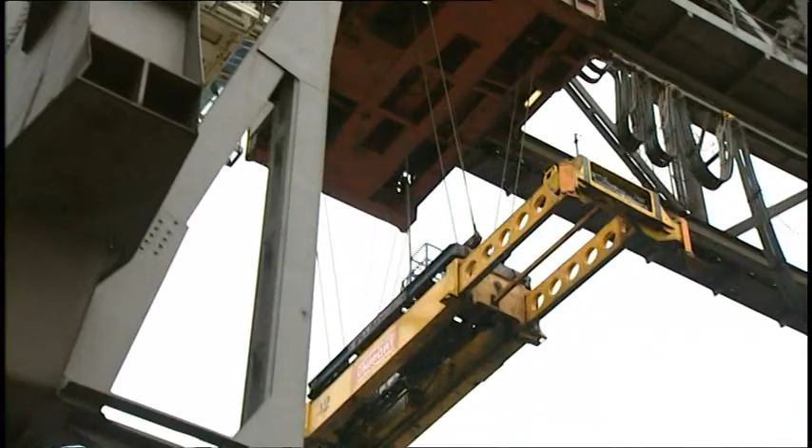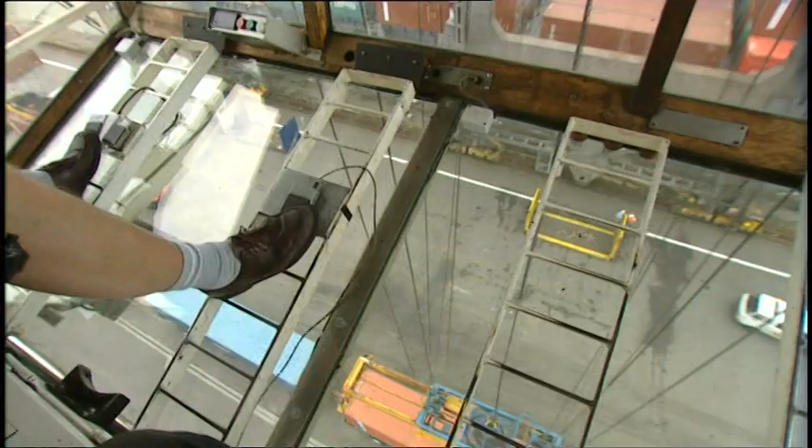Split or torn containers, fewer cargoes would end up like this. Look out for holes near the roof corners. This is what causes them. A moment's lack of attention up here, and a crane spreader turns into a 10-ton hole punch. Okay.

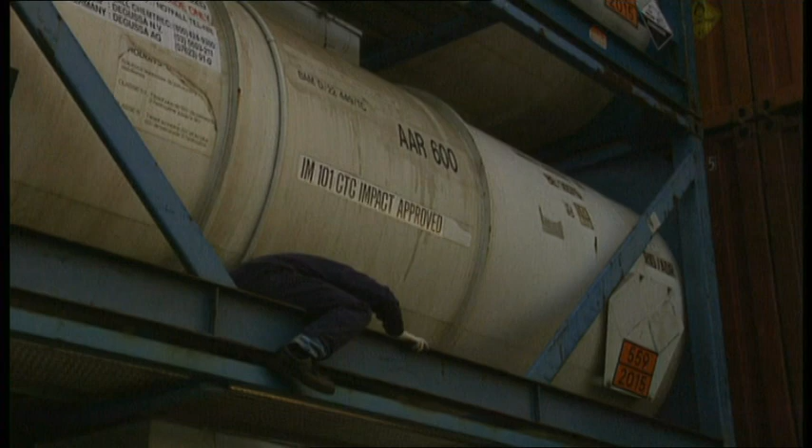Many sleepless nights have been caused by leaking tank containers, particularly if what they're leaking is dangerous goods. Why not save yourself a nightmare? Check them as soon as they're loaded.

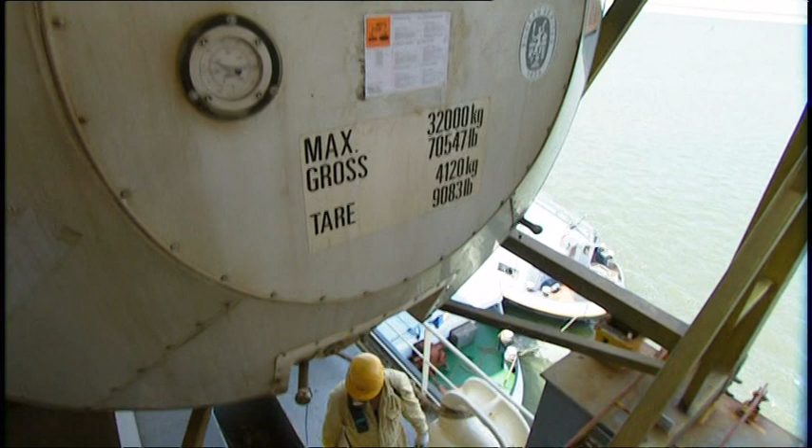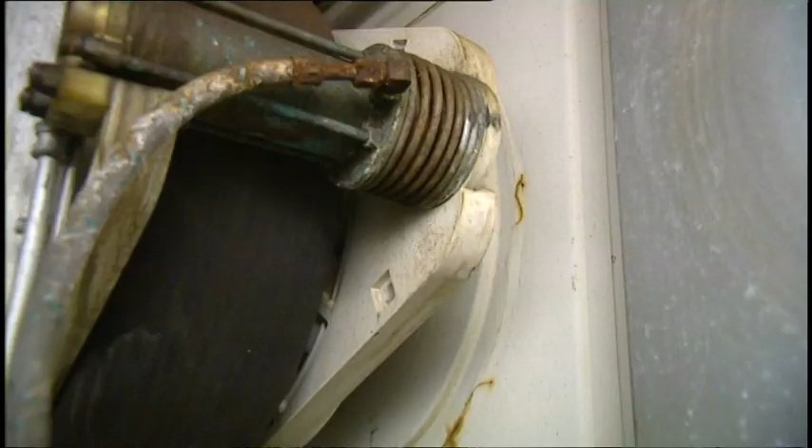Porthole reefers look straightforward enough. Yet it's often discovered too late that one has been stowed where the cold air supply is the wrong temperature for its cargo. Or its portholes haven't been opened and there isn't room to reach them. Sometimes they can't be connected because they're stowed in a slot of the wrong height, or even the wrong way round.

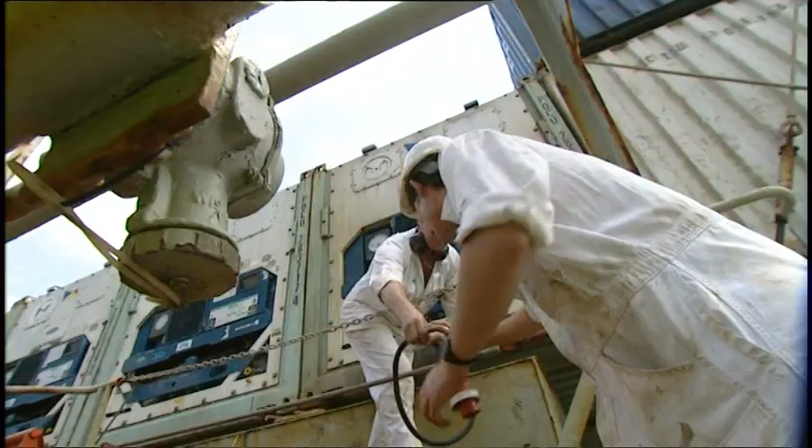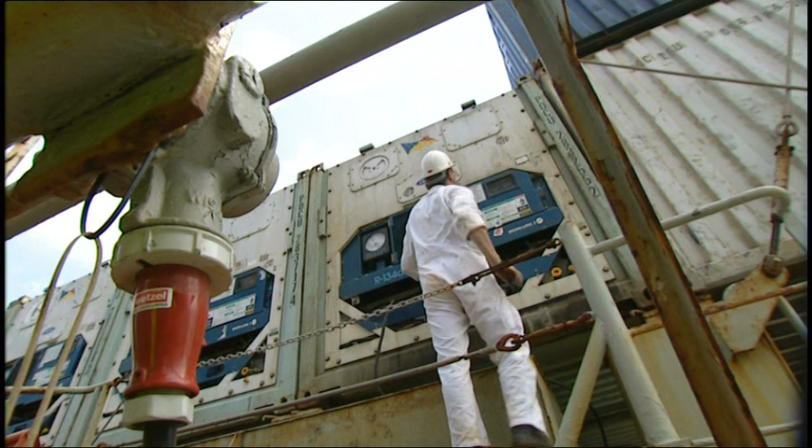Integral reefers need special attention. If the equipment is dual voltage, as it is in many American containers, check the transformer setting before connecting up. Then switch on. It may seem obvious, but simply failing to switch on causes many claims. Now switch on the container's equipment and take a moment to make sure it's running.

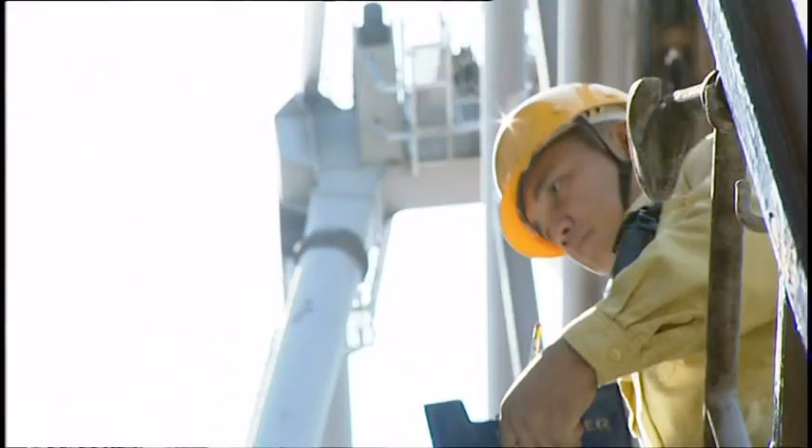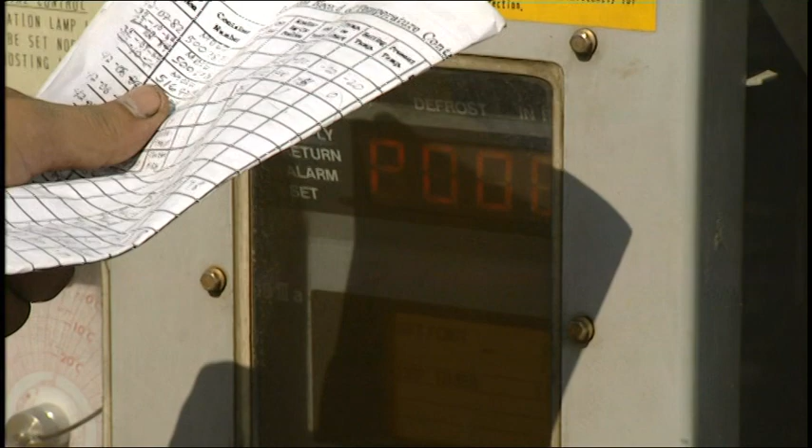It is, of course, vital to check that the equipment is set at the temperature the shipper has specified, as set out in the reefer cargo list. Even this may not be as simple as it sounds. Displays aren't always easy to reach or to read. This one actually says 5 degrees, and it's permanently set to centigrade. Some can be switched to read Fahrenheit instead, and it's easy to mix them up under pressure.

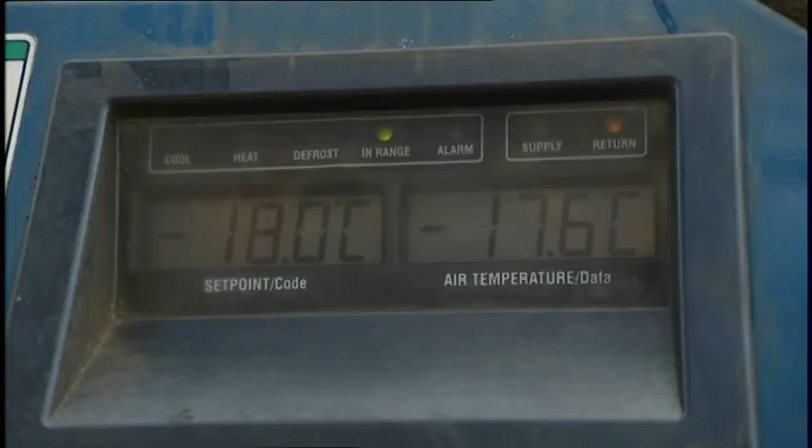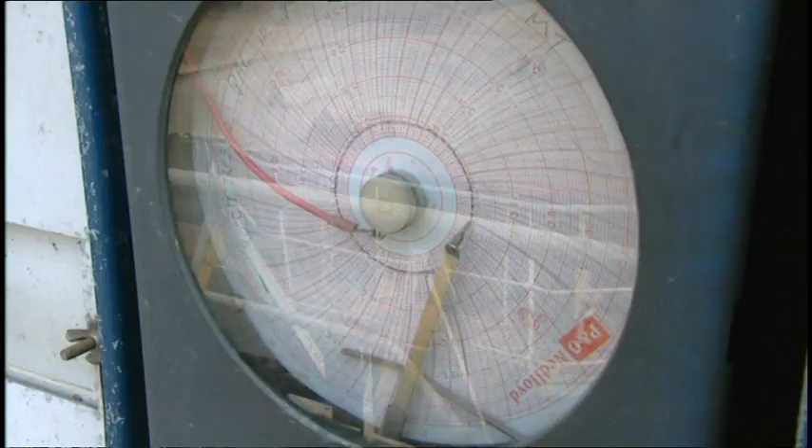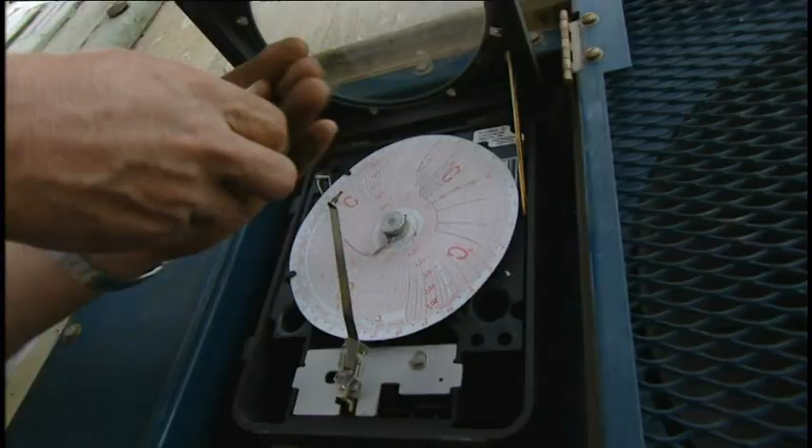To make sure that the set temperature is actually being maintained, it's necessary to check the control temperature as well. Any variation which exceeds the norms for the type of container and cargo carried must be investigated. If a Partlow recorder is fitted, make sure a chart is in place and that it shows the correct temperature has been maintained before loading. If it's clockwork, wind it up.

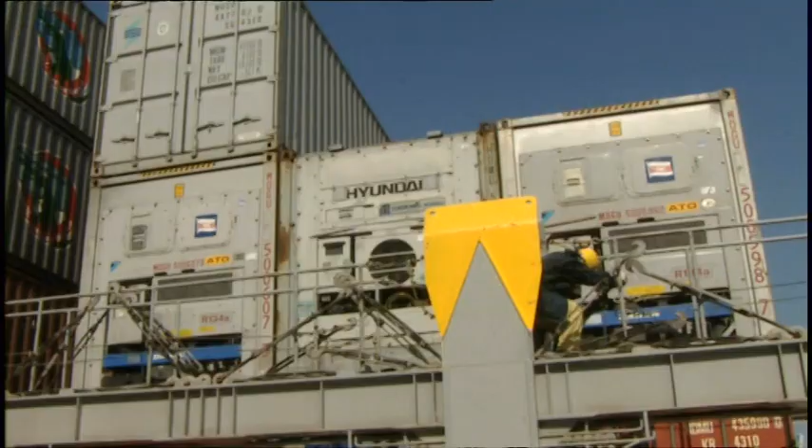The more sophisticated integral reefers become, the more important it is to make sure spares and manuals have been supplied for each type on board. Any irregularities should be referred to the terminal without delay. But unless you've been authorized to do so, never alter a set temperature. In chilled cargoes, getting it wrong by even 1 degree generally spells disaster.

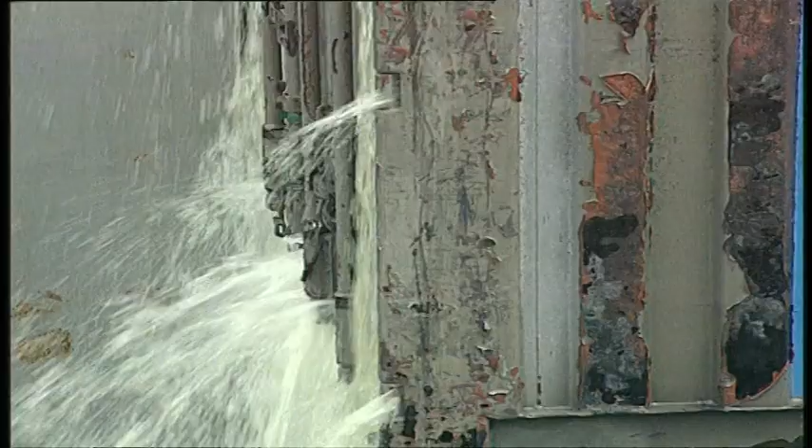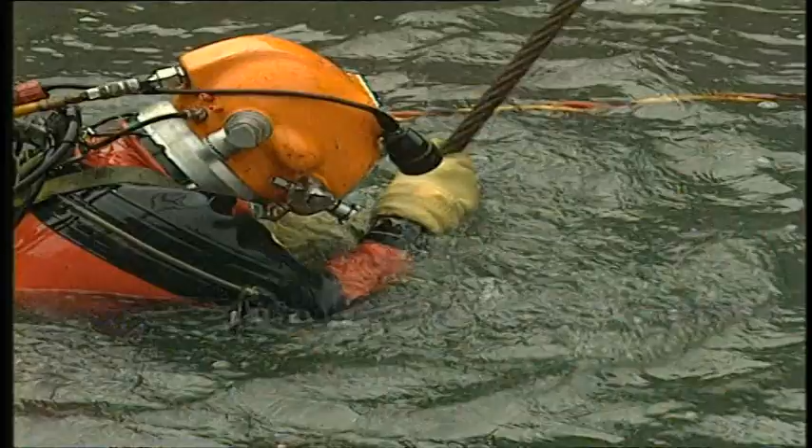Containers overboard add up to 15% of cargo losses. They also endanger other seafarers and the environment. If they cause pollution or obstruction, the ship owner is obliged to recover them regardless of expense.

I couldn't believe what I saw. I've never seen anything like that, never. That's what people around the Sound today were saying about this ship. It's an American...

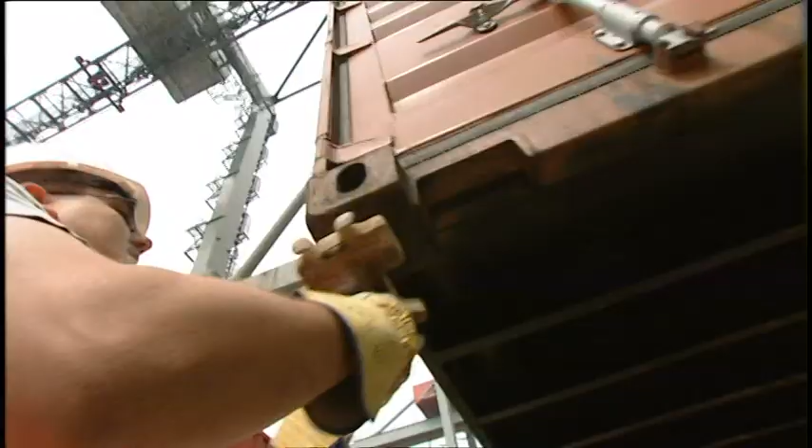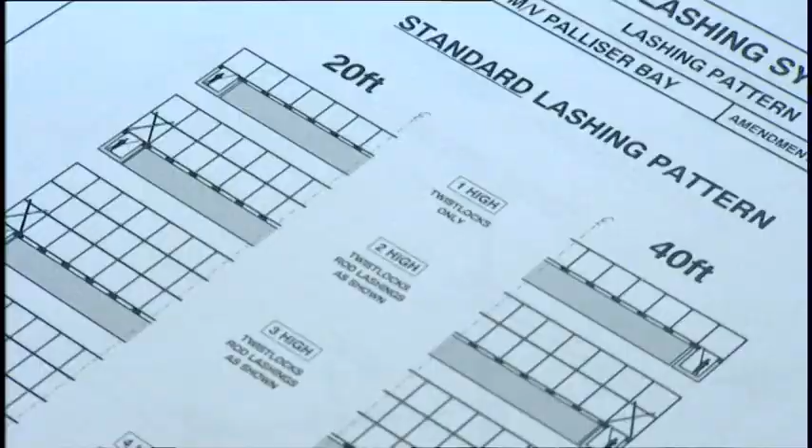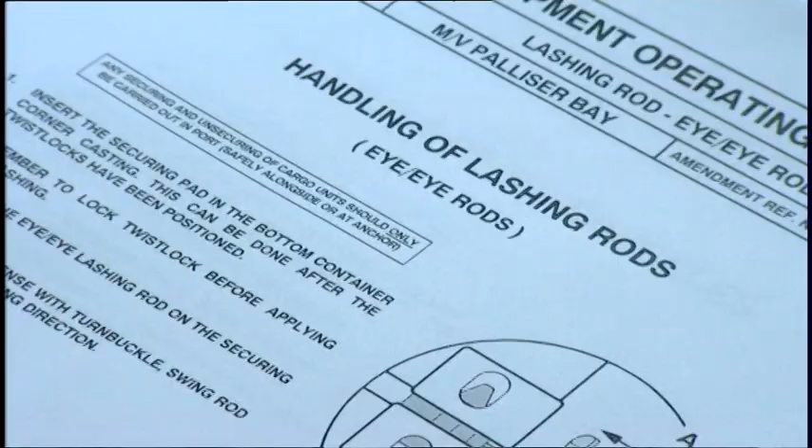Big ships, small crews and fast loading have made it customary in many ports for stevedores and riggers to work unsupervised. But the law still holds ship staff responsible for securing and lashing. Even though you haven't time to direct operations, don't let anyone forget that the securing system is a system. Keep an eye open for fittings used incorrectly or missed out altogether.

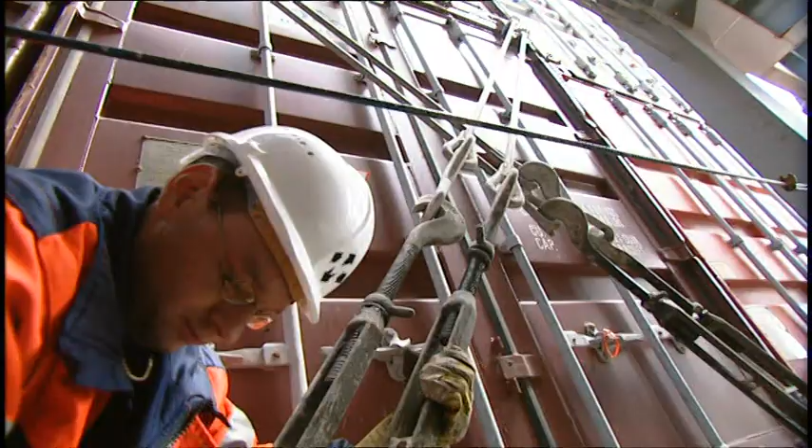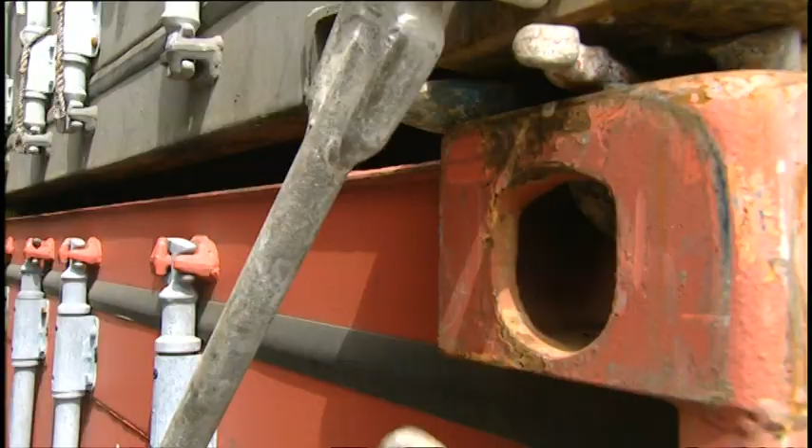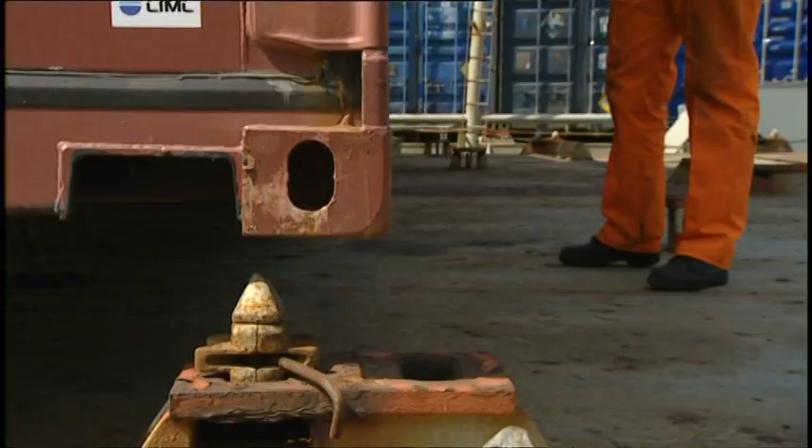Make sure lashings aren't over-tightened. More than hand-tight overstresses fittings and containers. And beware of lashing rods fixed over open twist locks, so they can't be locked. Twist locks must always be the right way up. Using them upside down is dangerous because they look as if they're locked when they aren't. Never allow this. Cracked fittings are the first to fail when the going gets tough. And here's a shortcut that's often cut short lives.

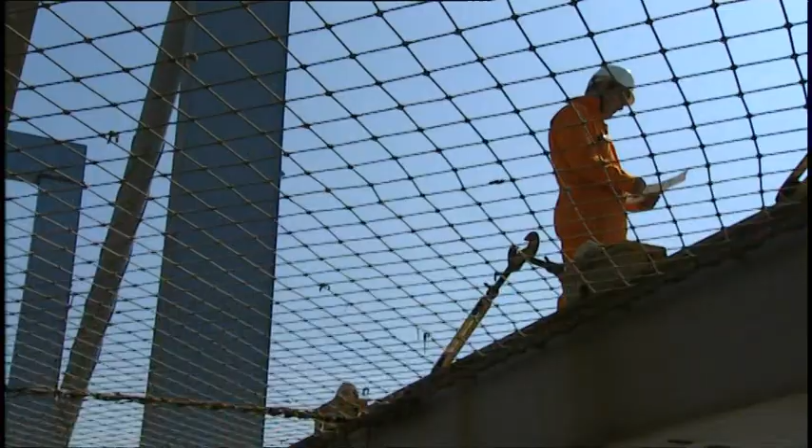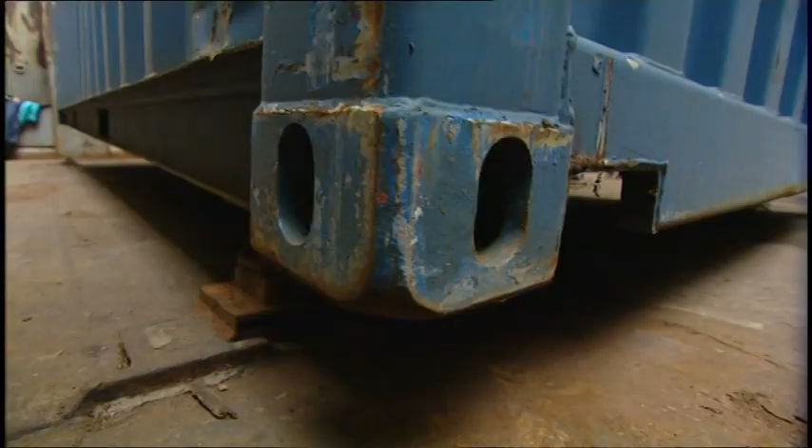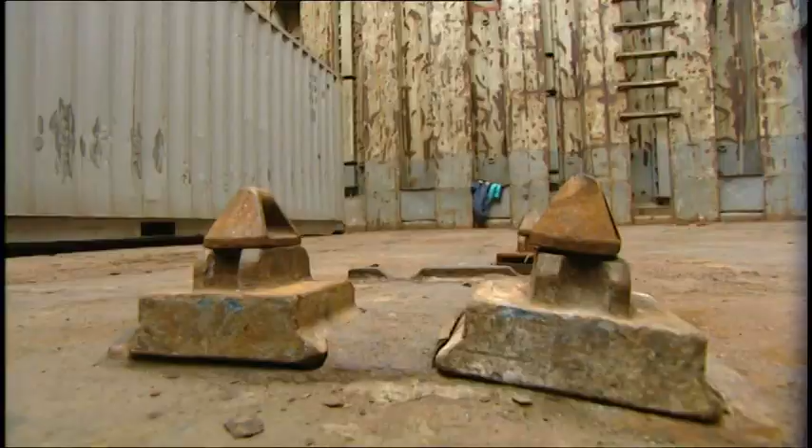Extra care may be needed on ships not designed exclusively to carry containers. The 4 lower corner castings support all the weight. Are they bearing on strengthened areas? Dented tank tops can cause gaps between upper tiers. This may discourage the use of the correct fittings, as well as putting extra stress on them.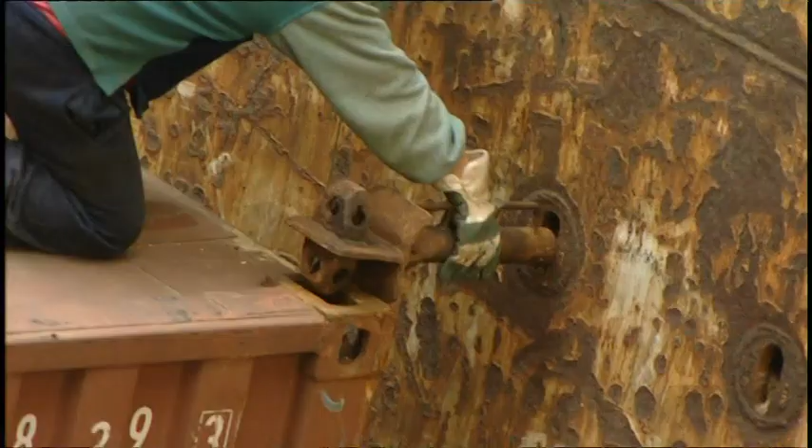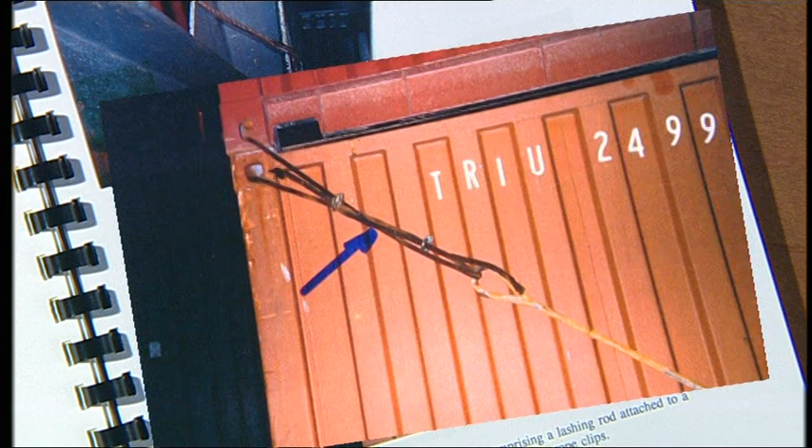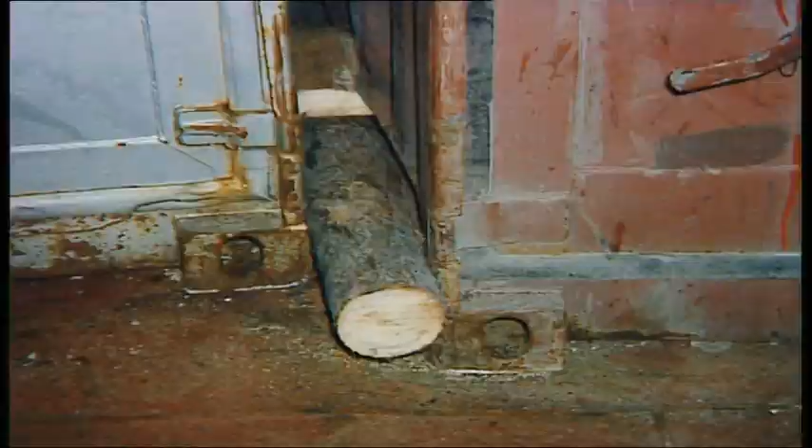Not all holds are as regularly shaped as this one, and securing points may not be where they're needed. But don't allow containers to be secured except by the corner castings. This surveyor's report is a catalogue of bad lashing techniques discovered on one ship. Well-meaning improvisation all too often ends like this.

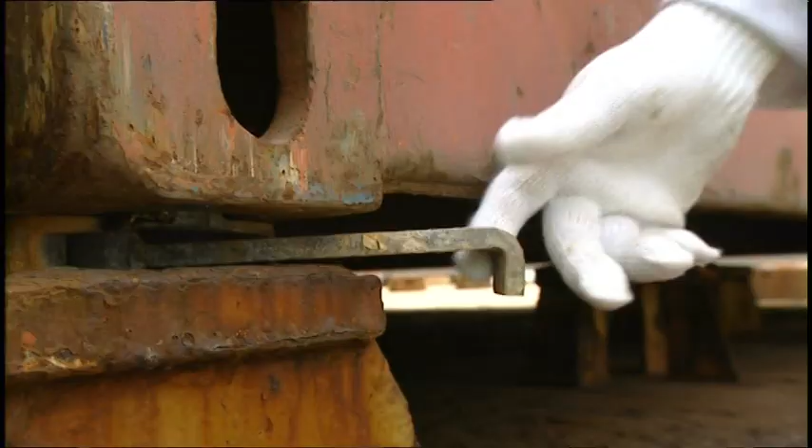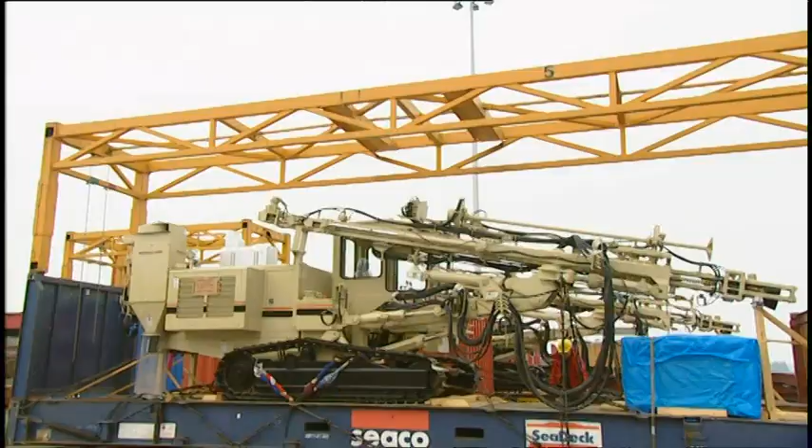Before sailing, a check must be made that all locks are closed and all lashings tight. Pay special attention to non-containerized cargo. Don't overlook cargo on flat racks. Losses, injuries and death regularly occur because mariners have simply assumed that cargo loaded inland is adequately secured for a sea passage.

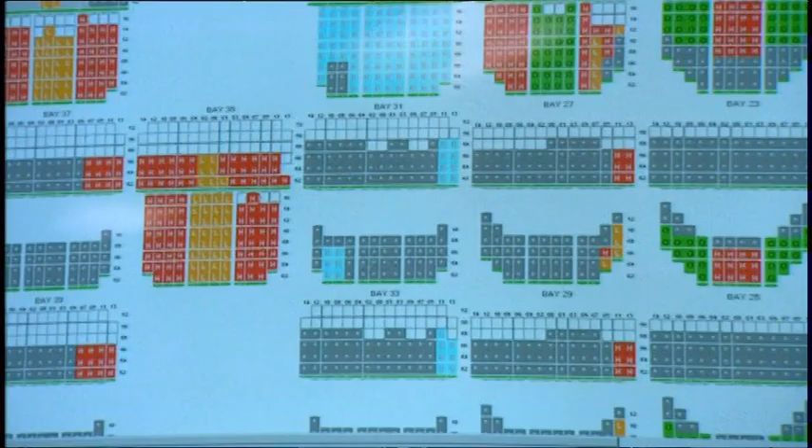Last but not least, record the care you've taken. Your log entry could be the ship's only defence against an unfair claim. Before sailing, the chief officer must ensure he has the latest information on stowage positions and weights to calculate stability, bending moments, shear force, and torsion limits.

On the voyage, poor surveillance of reefers leads to many claims against the ship. Unless a remote monitoring system is in use, checks that all are working properly should be carried out systematically, weather permitting. Carefully log all checks made and any defects found. And remember to order replacements for any spare parts used.

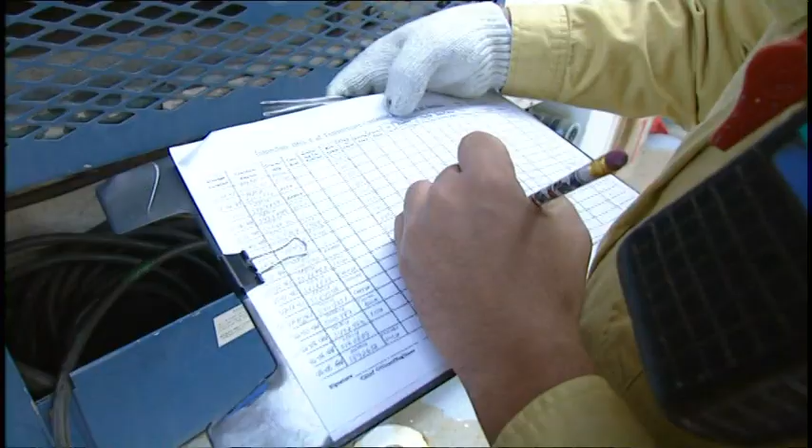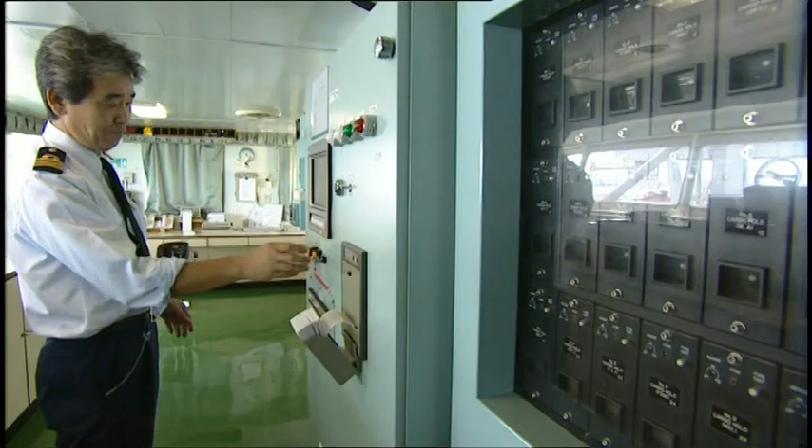Automatic monitoring systems reduce the workload on the crew and the likelihood of mistakes being made. They also contribute to crew safety in heavy weather. Lashings should be checked periodically, and always when heavy weather is expected, and again when it's past.

Force 7 outside, Captain. She's been rolling very heavily. Conditions like this put even the best lashing system in jeopardy. Can't have the cargo breaking loose, that's for sure. The forecast is going to be increased to force 8, and the wind will veer to south, Captain.

Weather routing and liner schedules aren't the best shipmates, but ploughing on until lashings fail is a frequent cause of major cargo claims. On average, losing boxes overboard costs $500,000. Money that could be saved by slowing down or changing course to ease the ship.

What are we steering? How's your head, Yuri? 243, Captain. Okay, right. Well, we'll bring her down to full ahead manoeuvring.

Full ahead manoeuvring, Captain. Remember, the ISM code affirms that the master has overriding authority to take whatever action he considers to be in the best interests of his crew, the ship, and the marine environment.

I think we'll steady her up on 260, Yuri. 260 steady. Right, we'll try her on half ahead too, see how she runs.

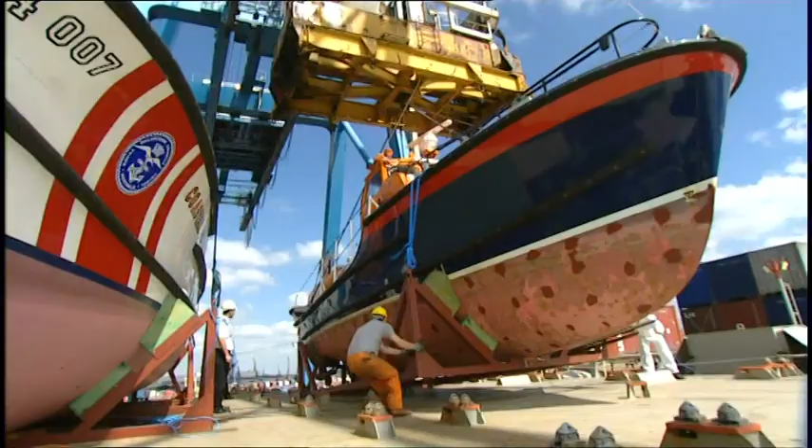When competition is hot, mistakes are bound to happen. But nobody wins by ignoring losses. Lost cargo means lost profit, lost customers, and lost jobs. Fortunately, everyone can help to stop this.

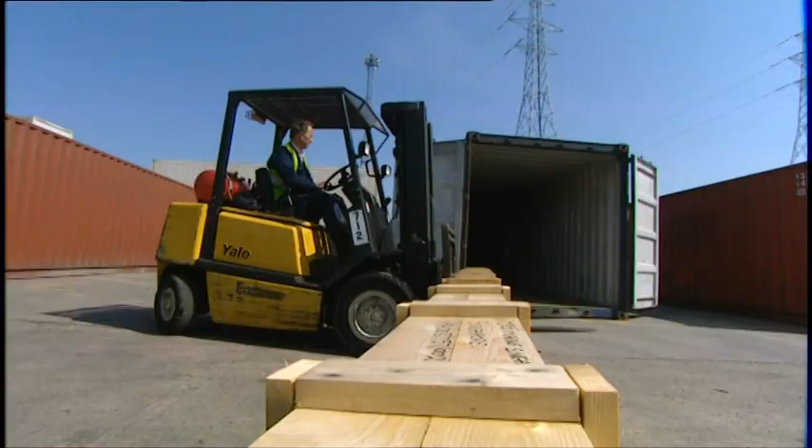Shippers can check that containers are fit for the job, package and pack with the sea in mind, declare weight accurately, and provide clear carriage instructions. Owners and charterers can give terminals the ship's vital statistics in good time.

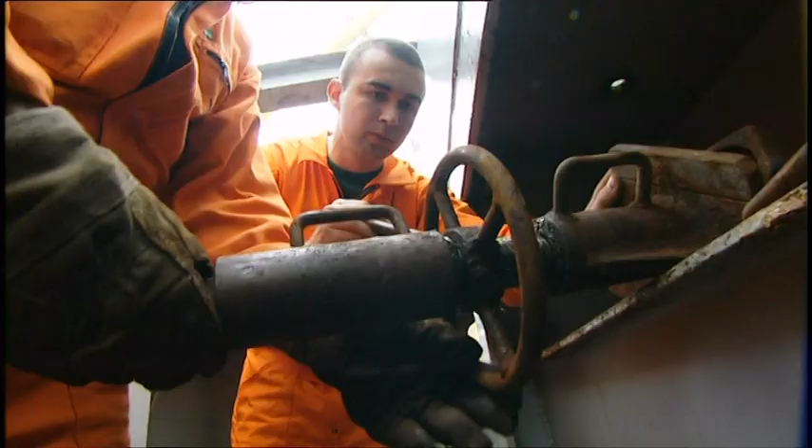Ensure that a flag state-approved cargo securing manual is always available, and that lashing equipment is maintained so that it can do what the manual requires. They can encourage masters to take whatever measures they see fit to safeguard ship, crew, and cargo.

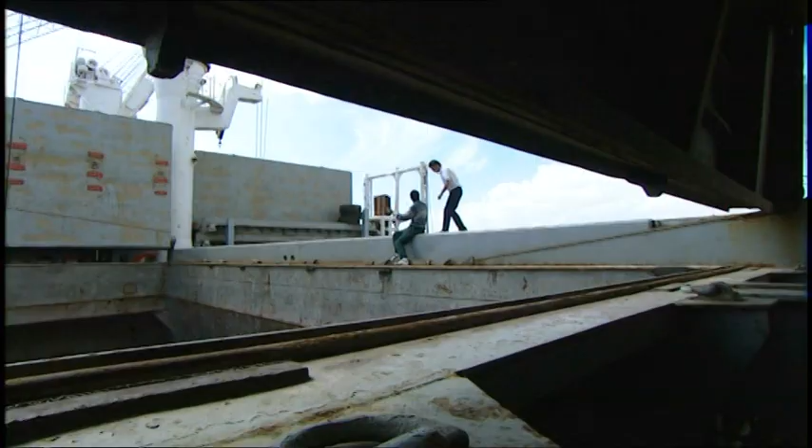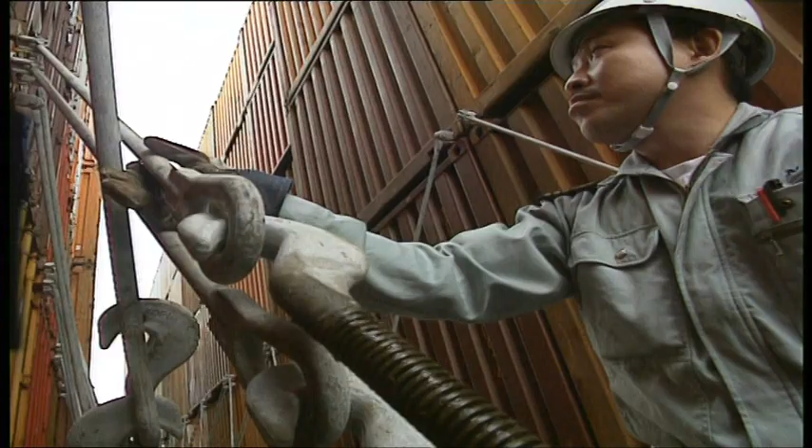Mariners can learn the limits of their ship and its securing system. Share this knowledge around whenever time permits, and confirm that containers have been correctly stowed and securely lashed. They can protect the ship's interests by keeping accurate records at all times, and by caring throughout the voyage for cargoes that are out of sight but never out of mind.